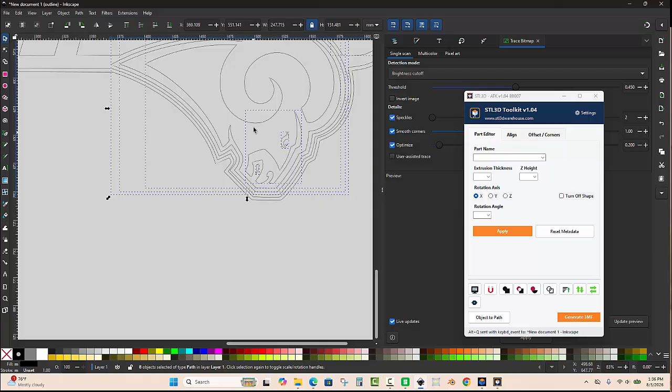Now we really have a mess. So let's click on our little display so we can just pull out the RAM. I think that's what we're going to do here - just drag it out. We dragged some other parts that we probably didn't need, but that's okay, let's just dump all that, I don't think we need any of it. Then we'll right click here and click back on our screen and take a look at what we got going on now.

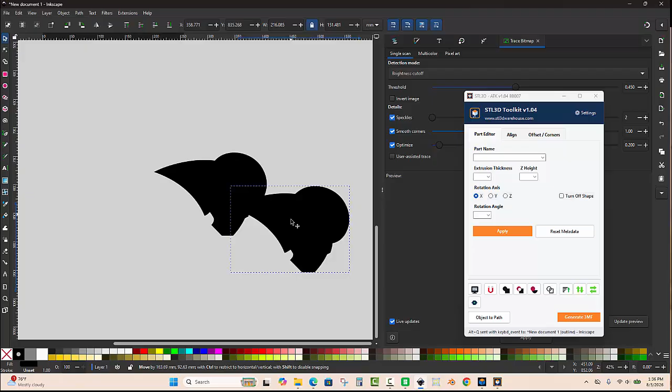So we're going to select everything and right click, and let's see what we've got going on here. Ah, I was breaking apart - I should have been combining. My bad, I don't even know how to use my own program.

Okay, so there we go. Now let's make this roughly the size that we want. Right now it's 150 millimeters, and that's pretty big, so let's shrink it down. How much, how much? Let's just make it 75 - I think that's probably a good size. Okay, and then let's go ahead and save it. We'll go to the desktop and call it the old Brandon RAM, and save.

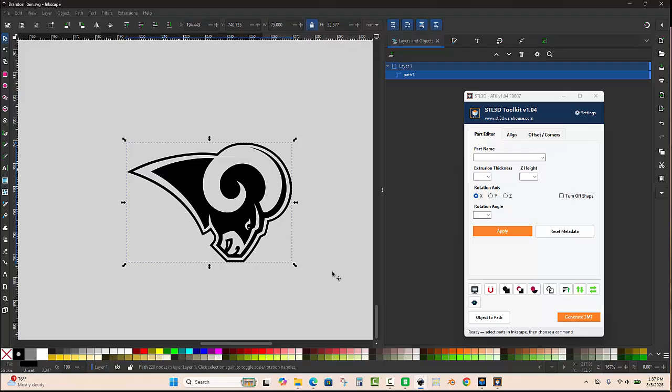Okie dokie, moving on, here's Bambu. Let's minimize this for a moment. So there we go, there's a koozie - this is just a random koozie I picked up off of Maker World. We're going to take our lid and flip it 180 - go to the Y direction here, flip it 180.

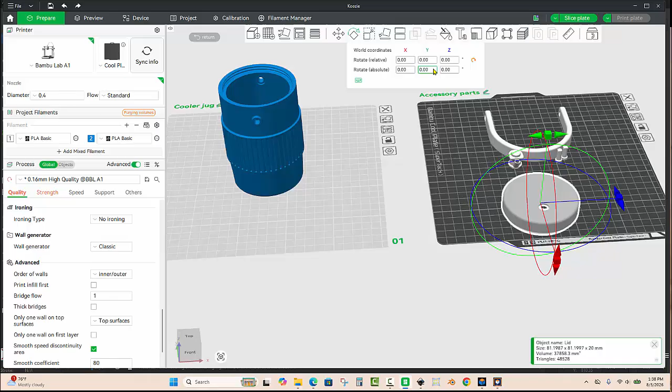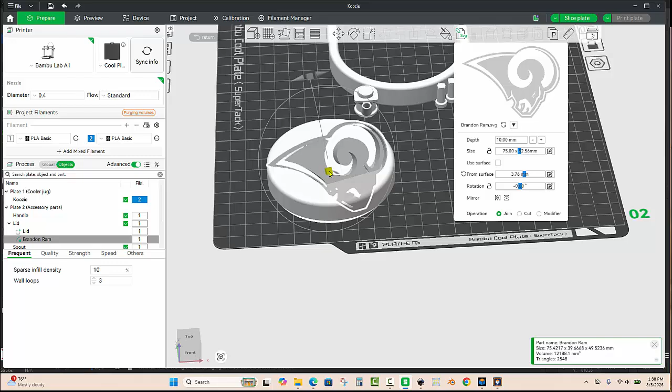Now the thing of it is, if we have our lid selected, and then we hit Control I to bring in the old Brandon RAM, it's automatically going to be attached to my lid. So that could be helpful.

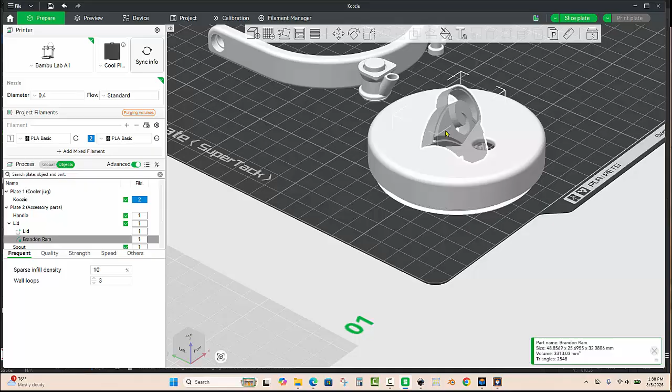Now if I go into my scale tool, we can scale it, so we can reposition this kind of wherever we want to. That's kind of weird, that's a weird orientation for sure. I don't know exactly why that would have happened, to be honest, but we can right click and choose Edit SVG - let's see if we move this. There we go, I think it must have tried to connect it right here maybe, I don't really know, but yes, this looks much better.

Now, what do we want to do from here? Well, first of all, the depth - we don't really need it that deep, do we? Let's go ahead and make it a mil deep, and then we can go ahead and scale it from here. So if you wanted to cover up the whole thing, I guess we could do that too, but let's just say we want to do it like that.

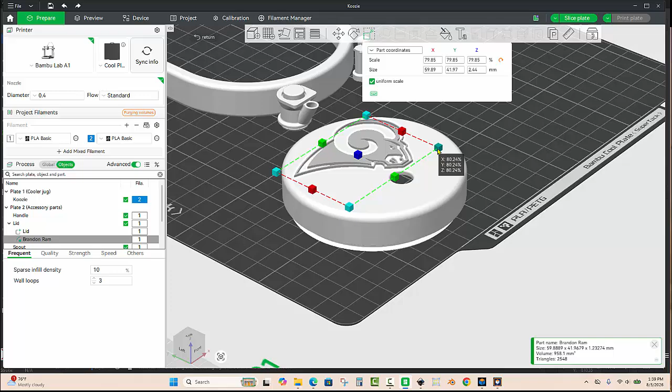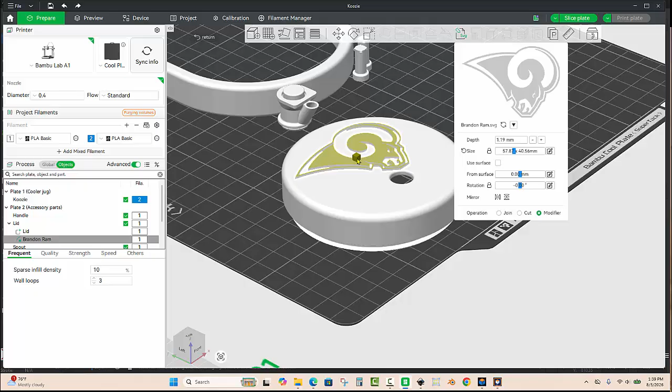Okay, now we're not out of the woods here. We've got a couple of options, and probably the easiest option to use would be your modifier. So when we use the modifier, essentially what it's saying is wherever the RAM is touching our lid, that's where the color change happens.

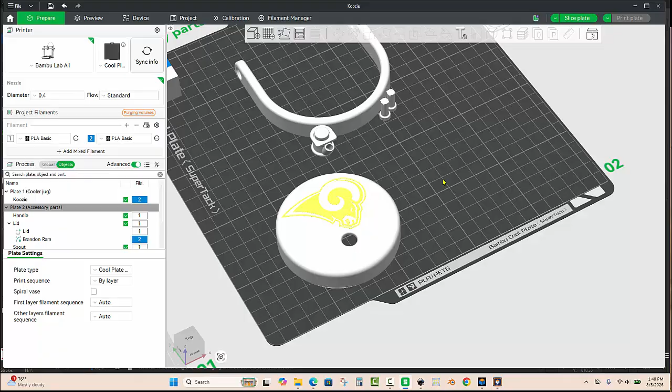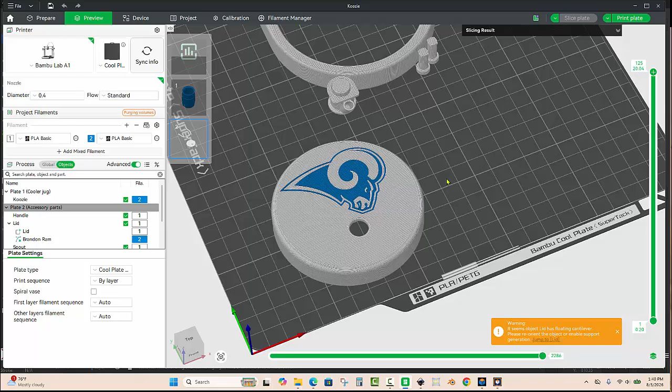So right now the RAM is yellow, but let's just say for the sake of argument, we're going to make it blue. Now, when we're doing it this way as a modifier, and we slice our plate, it's going to show as yellow, but because we used the modifier, it really is going to print blue. You just change your filament color to whatever color you want, and that's ultimately what it's going to print.

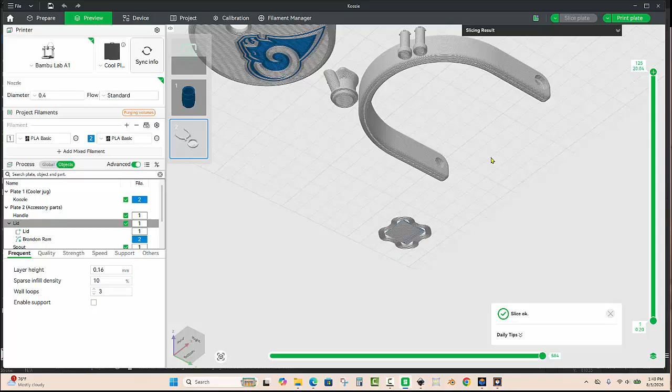Now we do need to go ahead and flip this back over, so we'll move it back over 180 here. And now if we go ahead and slice our plate again, because we do want to print this face down, let me see our RAM head. It's still printed on the top of our Koozie.

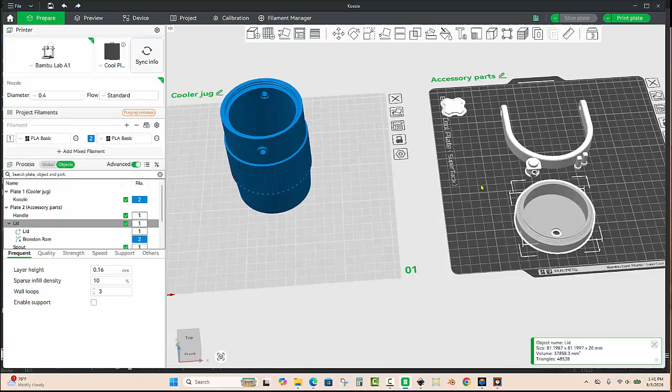So that's it, folks. Sorry to disappoint. It's not any more complicated than that. So there you go. Hopefully that helps you out, Brandon. Get you another step in the right direction on your 3D printing learning journey. But that's how to do it. And of course, it'd be the same if we wanted to apply it to the front of our Koozie.

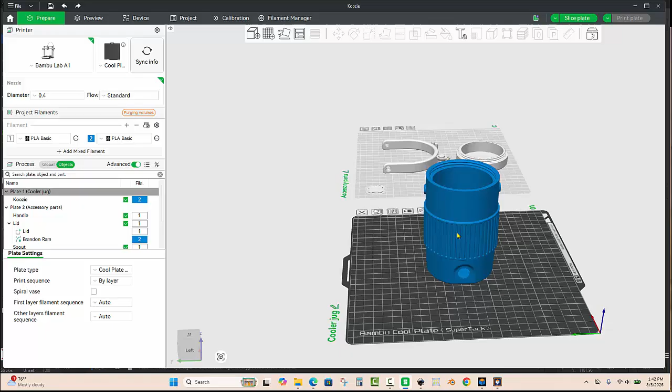So let's go ahead and hit File, Save As. Let's just call it LA-RAMs. And then if we want to go back to our Koozie file, we're going to select our model and then Control-I to open up LA-RAMs. Whoa, that turned out kind of big. We'll go ahead and scale it down. All right, something like that.

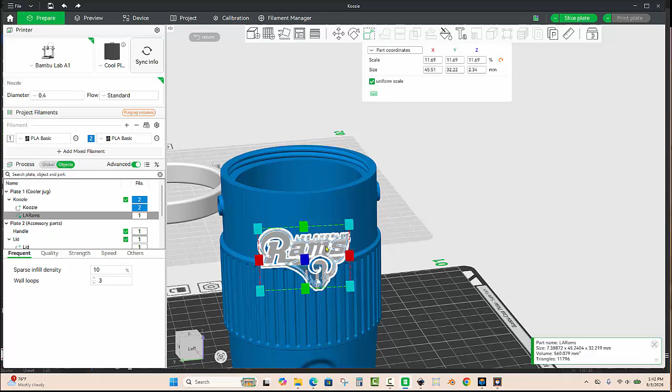And then, yes, we can go ahead and right-click. So we want to right-click and edit the SVG. And then we'll use that little yellow cube to kind of position it wherever we want it to. We could set our depth. Okay, so you see how that looks on the front of our Koozie now.

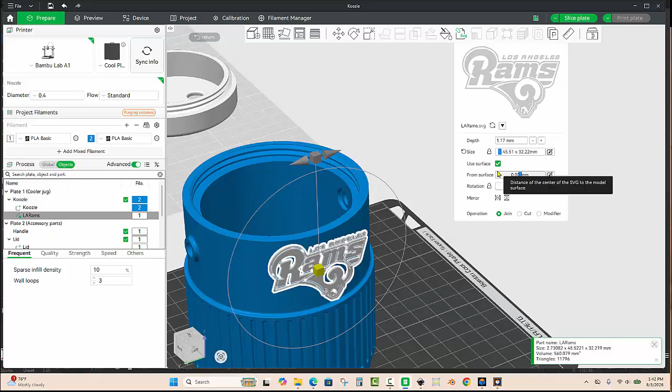So let's go ahead and click on it again. Right-click and edit SVG, and then we can use surface. So we click on that. And then you can see how it kind of bends around. But just like we did before, if we want to, we could use our modifier, okay?

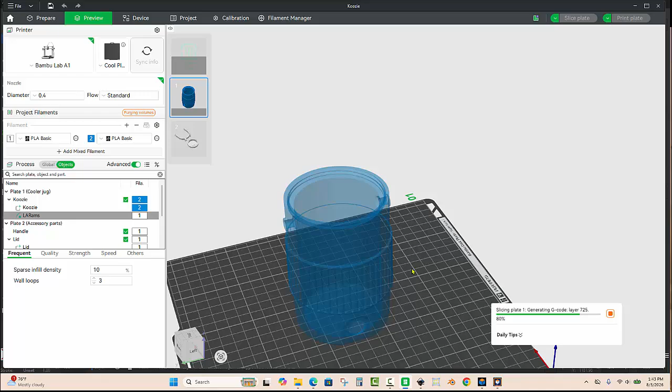Let's go ahead and slice the plate just so you can see what it does. Now, generally speaking on Koozies, obviously we glue the logo on. We don't do it this way anymore because it takes forever and a day to print, and you'll have a thousand color changes, which you're going to see here in a second. If we go to our slicing result, you see, that's crazy. 200 and some color changes.

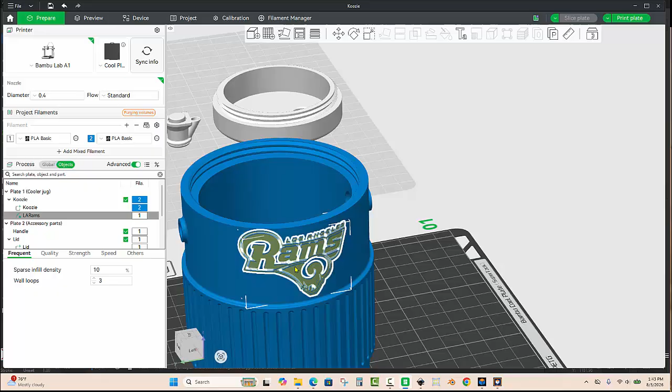Yeah, no thank you. But generically, that's how it's done. Generically. And then if we go ahead and edit SVG again and we choose the cut operation, then it's going to cut into it. And that can be useful too, because the nice thing about the cut operation is we still get the logo, but we don't get the color changes. So we save a lot of print time that way.

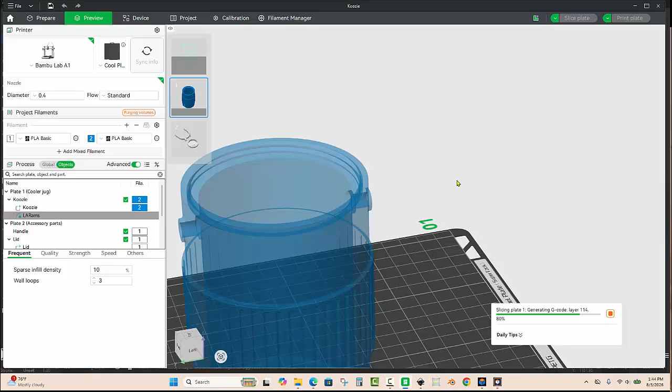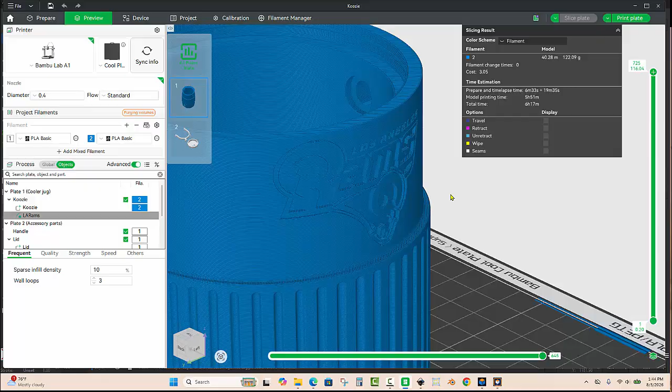Now this particular logo here is probably not the greatest example, because there's a lot of little tiny details that it's probably not going to show up. It's not going to print super well anyhow. But it's not terrible. You can kind of see how now that logo is recessed into it. Like I said, I don't know how well that would actually print. I'd have to scrutinize it a little bit more, but yeah, maybe it actually doesn't look too bad, does it?

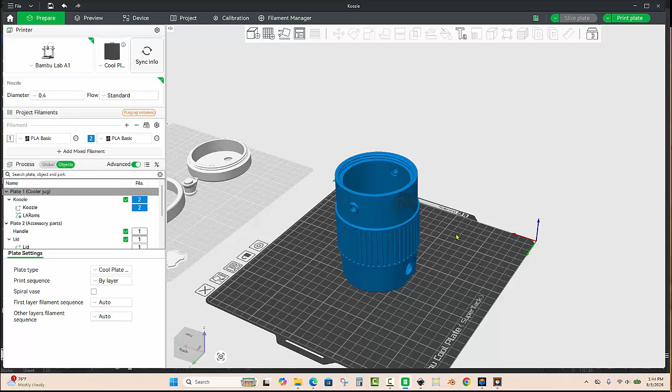But then that Koozie only takes 6 hours and there's no color changes, whereas before there was 200 color changes. Holy cow, so there you go. So those are kind of all the different options that you have available to you. What else can I show you? Same thing with text.

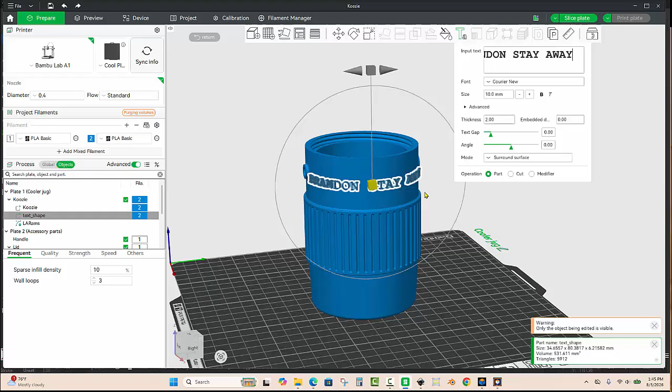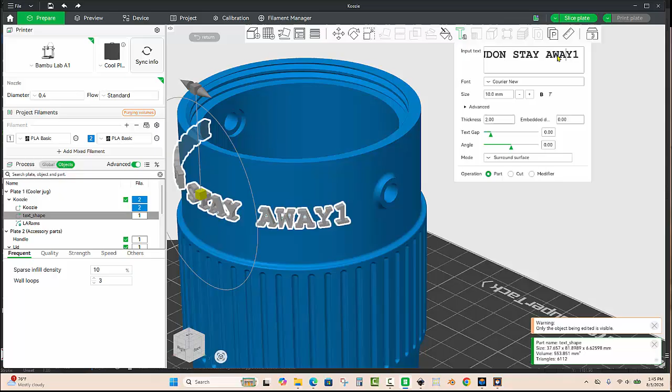So if we wanted to put text on here, when you have the part selected and then we add text, it's automatically going to go right on there. Okay, so we could just do it like that. And we can give it a different color, so we'll give it color 1. And then, yeah, we can edit our text, and so there you go. That's how it's done. We right-click and edit text, and then you just slide that down, and then we can put it down here somewhere. Now it's down here.

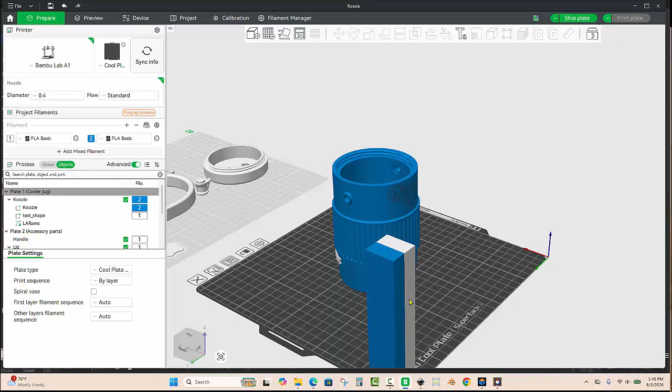So hopefully that helps you out, lets you play with some things there. But it's really, that particular project, really straightforward, easy project for you. So hopefully that helps you out. And until next time, thanks for watching.